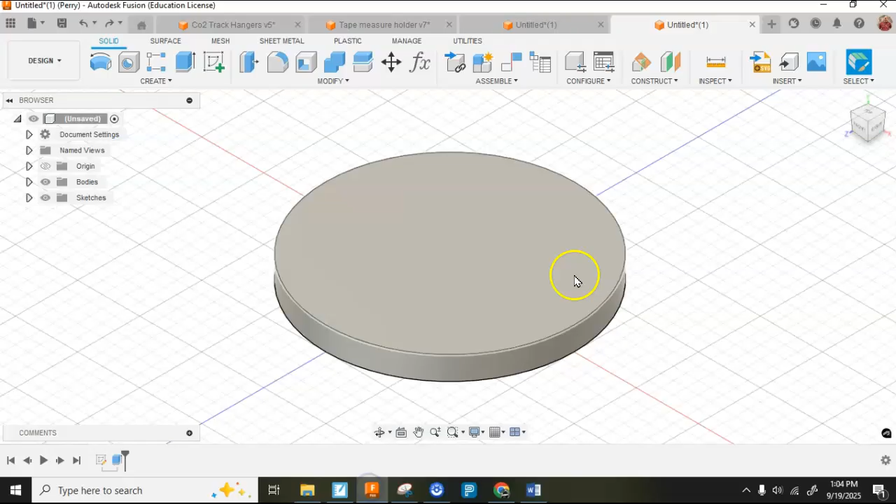I've taken the liberty of creating the disc already. That is 2 inches in diameter. Now I'm going to bring in a picture. To do that, I'm going to come up to the right part of the toolbar where it says insert.

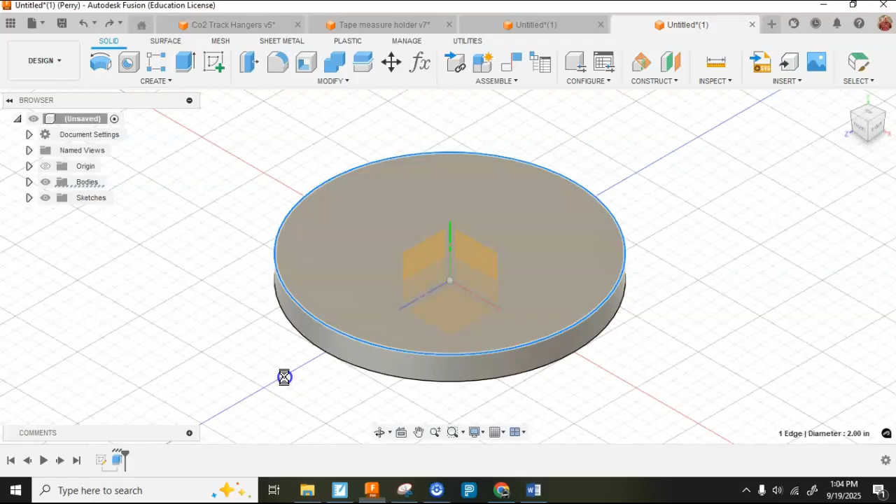I'm going to hit that drop down and insert canvas. I'm going to insert from my computer. This will be a little different on the Chromebooks, but I've already downloaded the picture I want. So there it is. I'm going to hit open.

It wants to know what face it's going on. It's going to go on this face right here. I'm going to go ahead and not hit OK, but I'm going to size it.

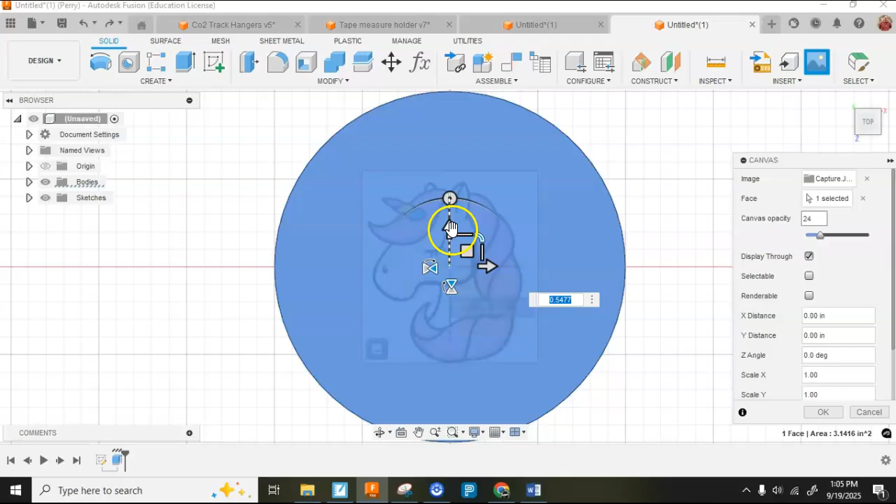So I'm going to go to this top view so I can see it, and I'm going to shrink it down a bit, and move it to where I like it. I'm going to make it a little bigger, and just play with this for a little bit. Now I'm remembering that I don't really want to go all the way to the edge.

I could decorate the edge later, but as I look at this, I'm going to put my daughter's name down around curved. So I want to leave a little room, so I want this a little higher than centered. I think that looks good. I might have to adjust things later.

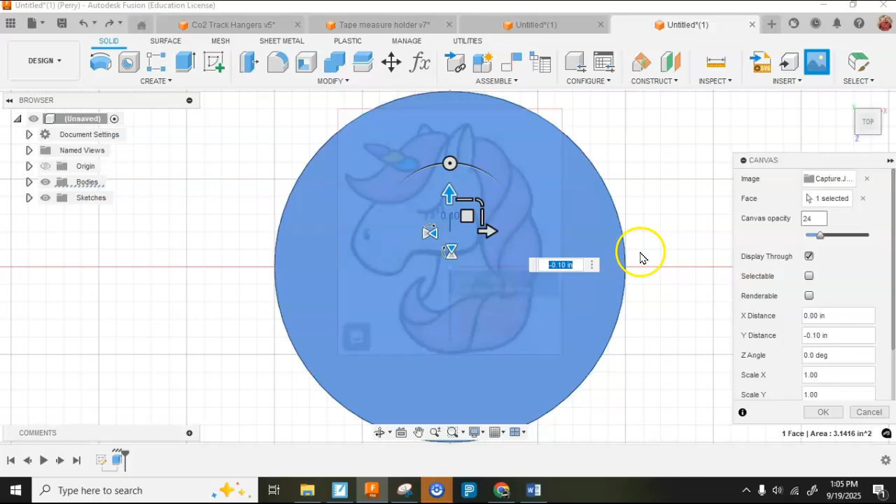There's this opacity over here. I don't want it really dark or really light. I'm going to go about 24, and then I'll be able to turn the canvas off. I'm going to hit OK.

I think that's going to do it. If I were to come up here and just hit that eyeball on canvas, it'll disappear. So I can get rid of it after a while.

What I want to do here is I want to break this into closed loops. I'm going to take some liberties here, and start by doing this loop closed. Then I'll do this as a loop. Then I'll do this as probably the same loop. I'll probably simplify that horn.

I'll do this as a loop. This is a closed loop. This is a closed loop. That way I'm going to be able to extrude it.

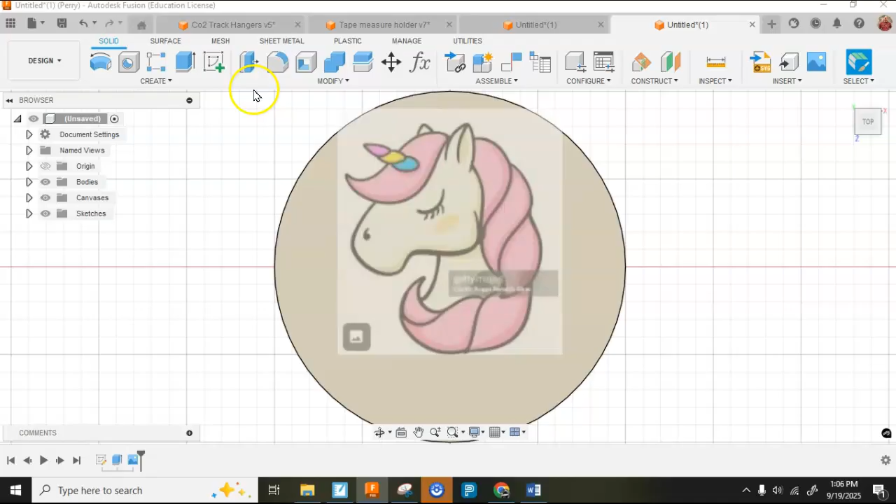So I'm going to get to sketching, and then I'll pause the video eventually so you don't have to watch me do this, but I'm looking at 20 minutes of work here. So I'm going to create a sketch, and sketch right on the top surface.

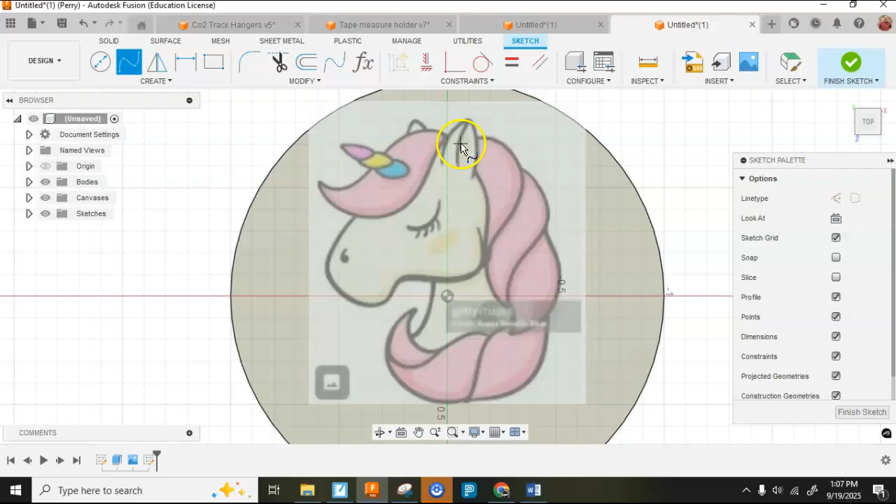I am going to use this fit point spline. What this does is it allows me to do a curve, and it anticipates which way I want it to curve. The closer together I put left clicks, the more detailed it can be. So I'm going to use that, and concentrate on this face area here.

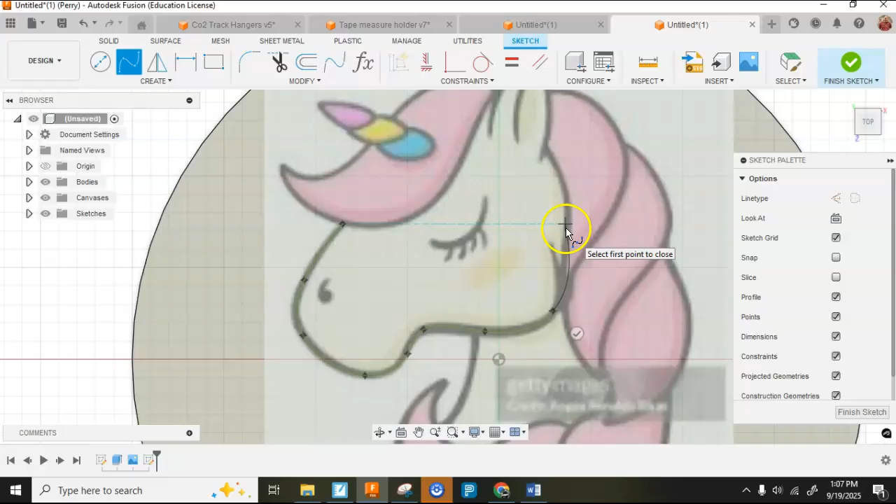I am going to start right here, and then come out a little ways and click, staying on the line, click, staying on the line, click. I want to put right there, there's a little bit of an inflection point. I'm going to ignore that part going up because I can't have dead ends - it has to be a closed loop. So I'm zooming in and zooming out.

I'll go close together here, and then I'm ignoring that ear. I can show you how I'll put that back in later.

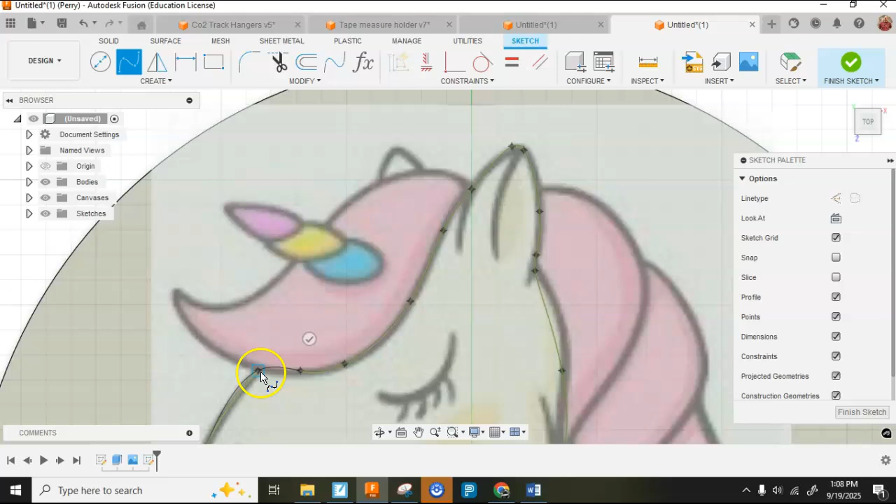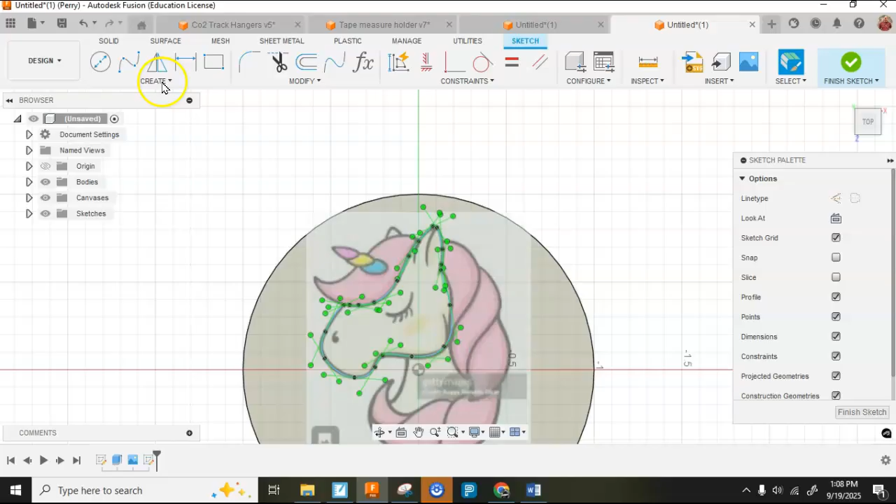And I'm going to put another one close. Boom. Alright, now I know it would work because if I hit OK, you can see it highlights. It's closed. So now I'm going to go and do this one, and then this one. I'll do one more for you so I'm sure that you see what I mean. So I'm all in the same sketch.

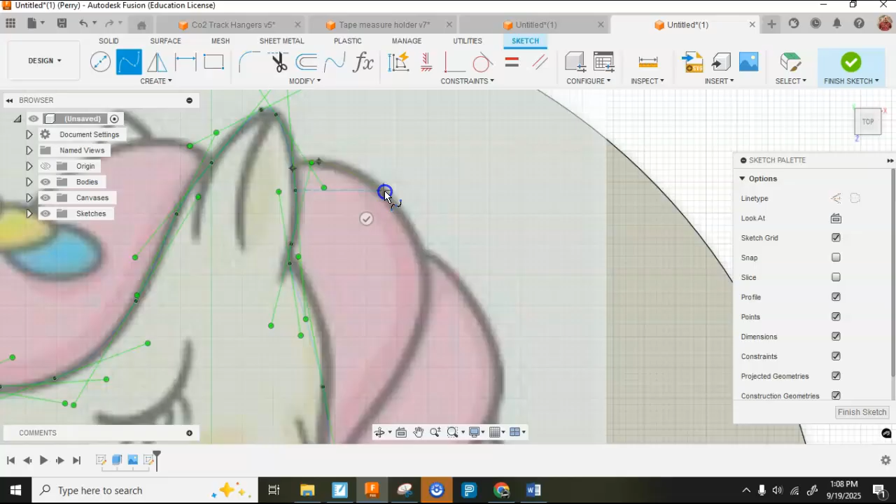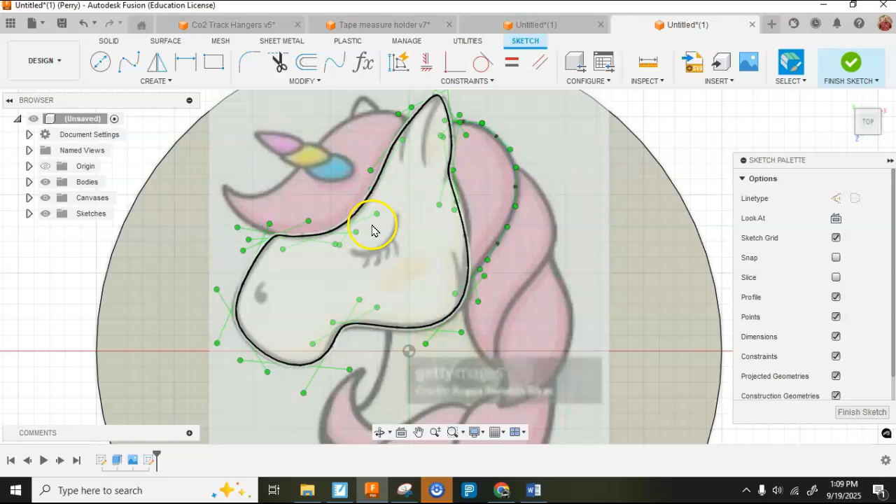I didn't start a new sketch. Alright, so I want to lock on this to start because I'm going to use that edge that I've already used a little bit. I'm going to lock on this edge to start. You can see an X pops up. I'm going to come down here and see how the X pops up. I want to make sure I'm all snapped on that line. If it's not going to work, I'm going to hit OK. And you can see now I can highlight that. I can highlight that. Now I'm a little off of that line, and I'm okay with that.

When you really think about this, it's going to only be 2 inches big, I don't think I'm going to get that much. So now I'm going to go around and do that for each little closed face, and then I'll pick the video back up.

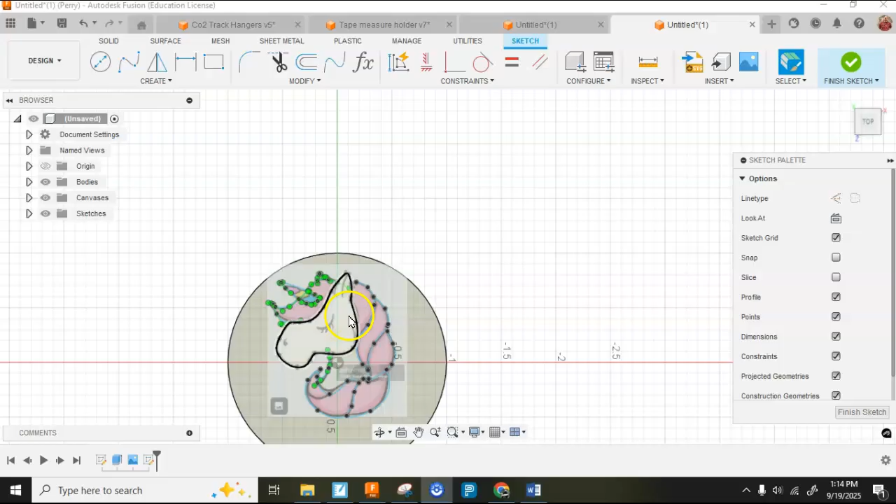Alright, through the miracle of being able to jump ahead, if I go around scan, you can see that's closed, that's closed, that's closed, that's closed, that's closed. So it took me a little while to get that. This is in 2 parts, but that is indeed closed. I'm going to go ahead and hit Finish Sketch.

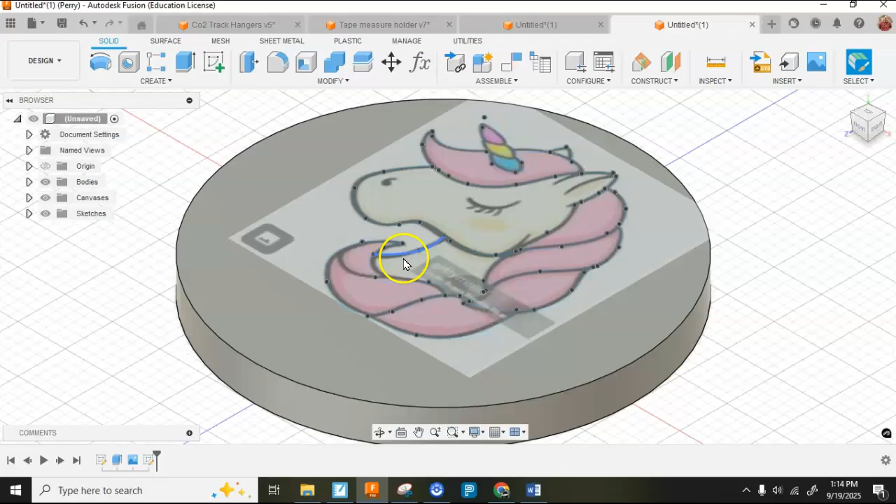Now I'm going to extrude slightly different amounts to start. I'm going to extrude this right here. That'll be my lowest extrusion. I'm going to do 0.05.

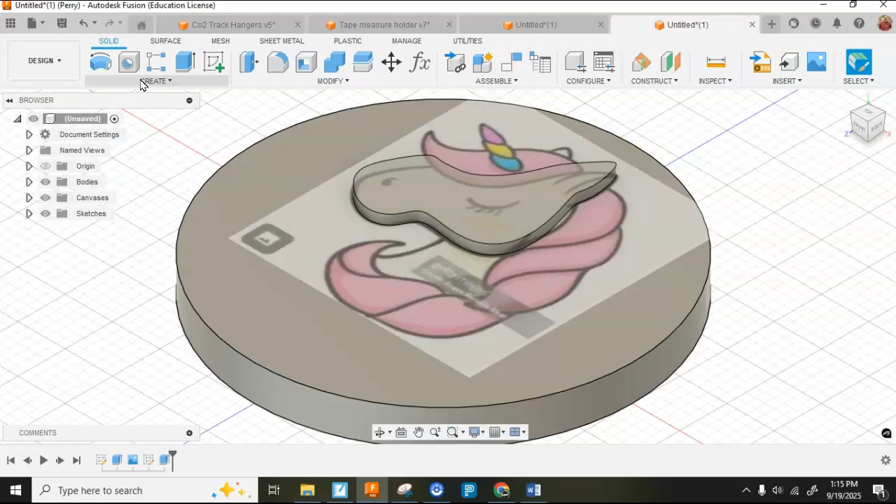The same amount will be this neck. Oops, cancel, don't have a sketch to extrude, so I'm going to have to come turn that sketch back on. So I came up to the browser, hit the drop down. That was sketch 2 that I just did. I'm going to extrude that up 0.05.

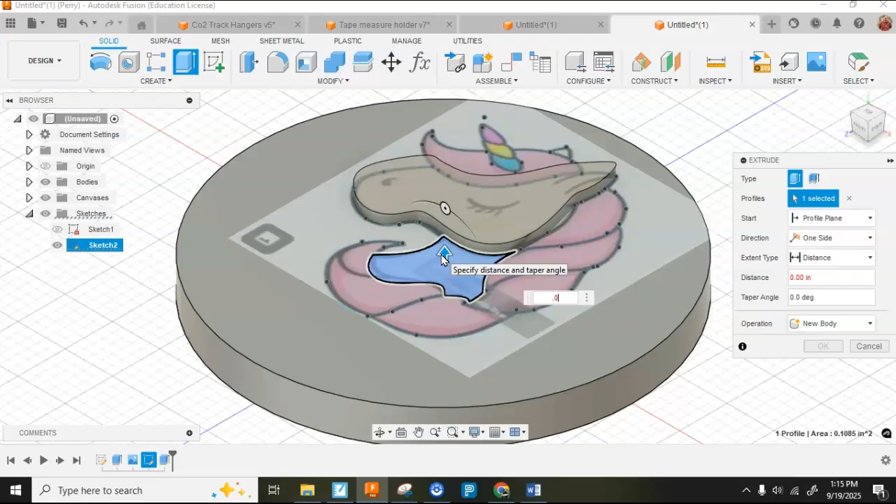Alright, now I'm going to extrude the hair. I'm going to guess 0.075. Just looking for a slight relief, so I'm going to go and

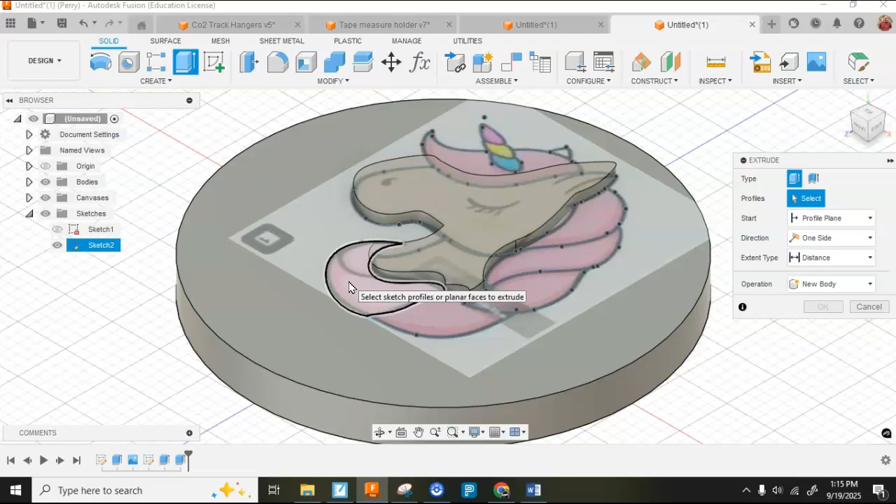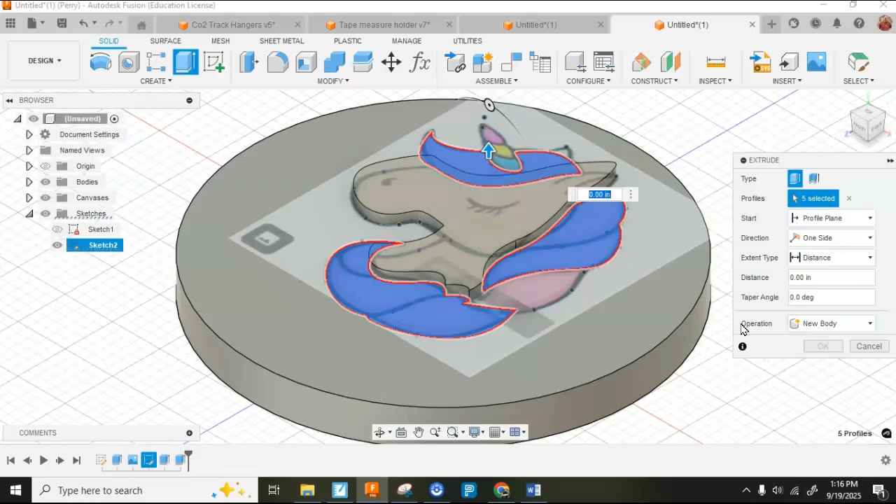See if I click them all at the same time. I'm trying to think of how I want to do this. Yeah, 0.075, and then I'm going to extrude that horn 0.1. I'm just going to see what that looks like.

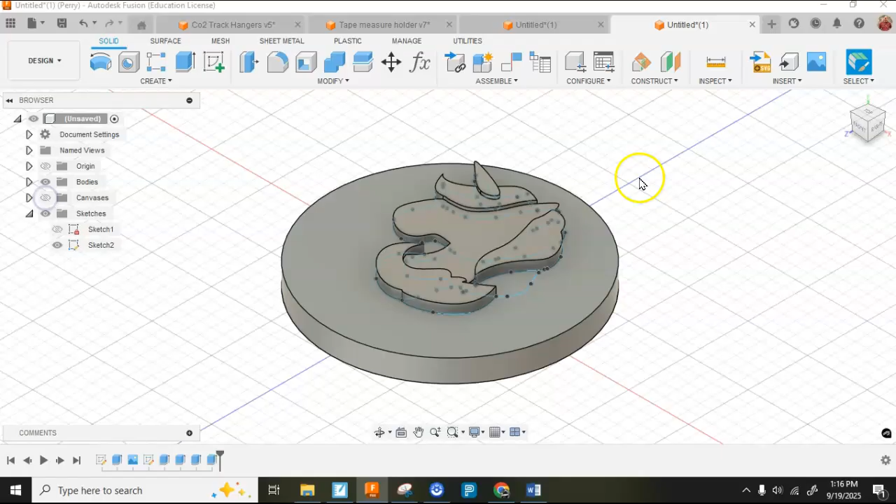Alright, let's turn off the canvas and see. Okay, so not bad. I can see that I wanted to extrude that 0.075 to bring that up. Alright, so that's not terrible. If I turn that sketch off, I can see it's a unicorn.

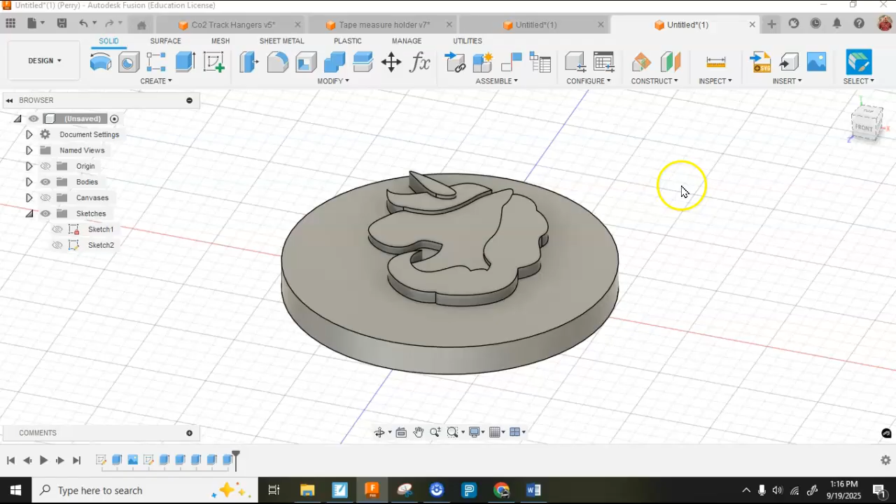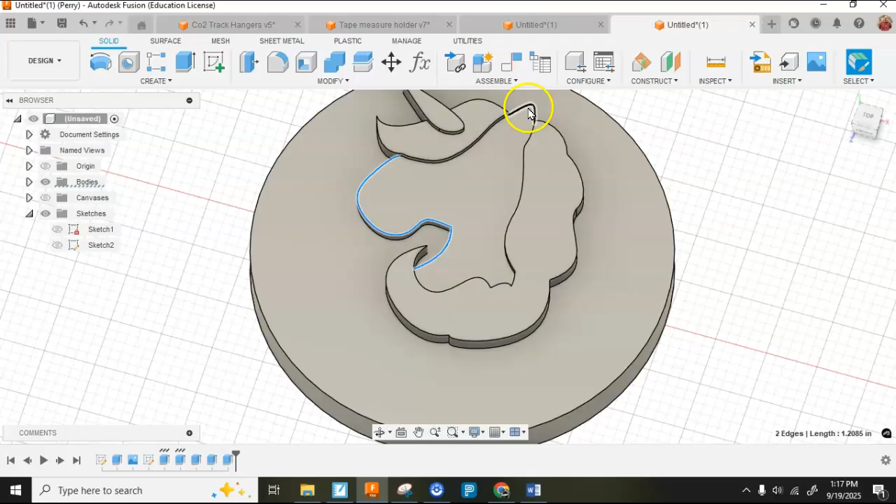I'm going to add a little detail. Now, I'm interested in making it look a little bit relieved. Okay, so I'm going to look at shift clicking some lines and seeing if I can right click and fillet those slightly. You're not going to be able to fillet much complicated curves. If you see, if I start to just even drag it down, it errored pretty quick. So what is the biggest fillet I can get?

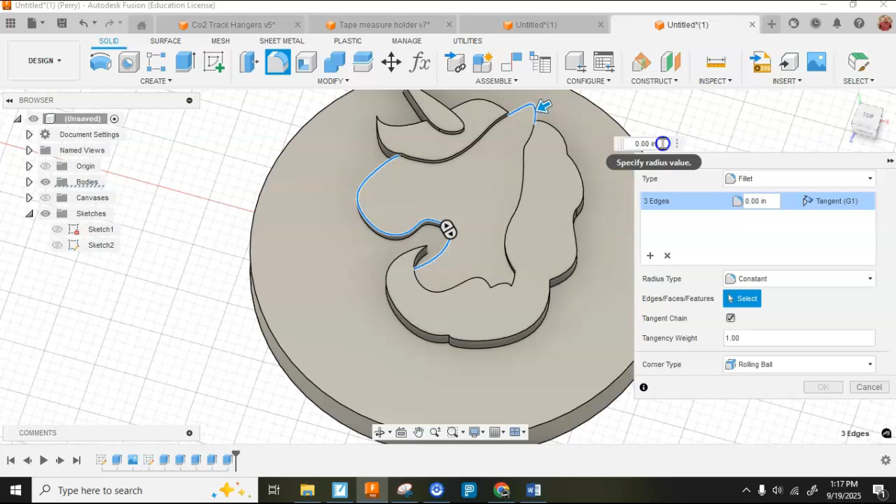Alright, so I'm going to start with 0.025. Alright, that does it. Let's see if I can get greedy and go to 0.03. Yeah. So you can see what that starts to do.

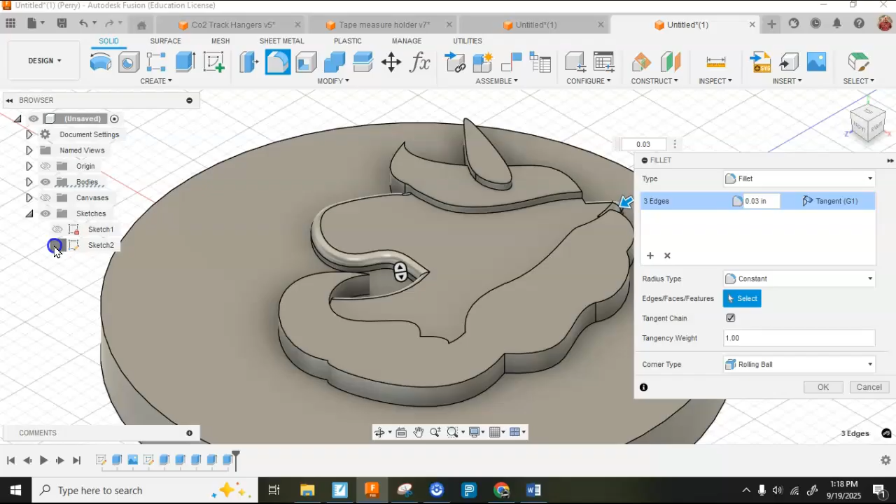Whoa. The lines in between the hair that show that separation, if you go back to that original sketch and show it, those lines I'll probably do, probably create slightly more complex shapes yet and extrude it out.

But I'm going to go and I'm going to start working on this. What I've shown you thus far is putting in a picture and extruding it. Simple shapes are easy to fillet and chamfer.

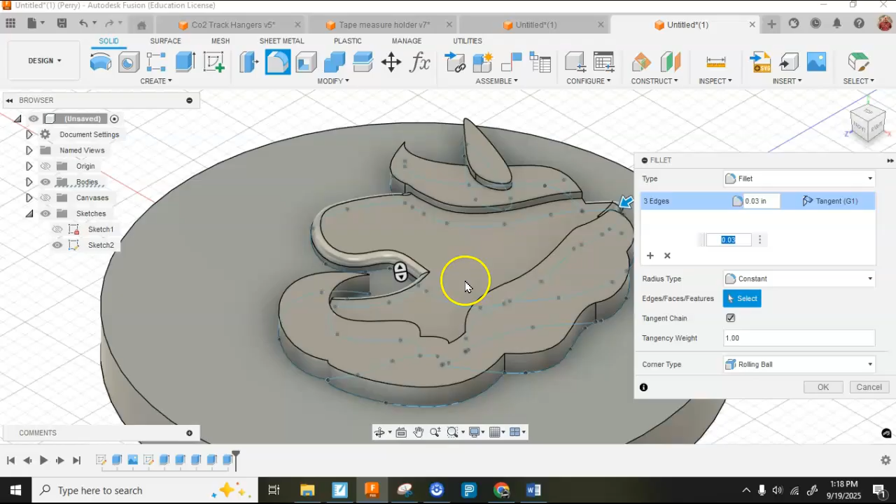Complex shapes, oh boy, this is a path that I would discourage you from going down right now, because I might put an hour in trying to fillet that. And while I'm okay with putting an hour in to fillet that, I'm not sure that you're going to be interested in doing that. And there's a chance that I put an hour in and I'm unsuccessful. But that is part 1, and this shows us how to put an image in and extrude it.